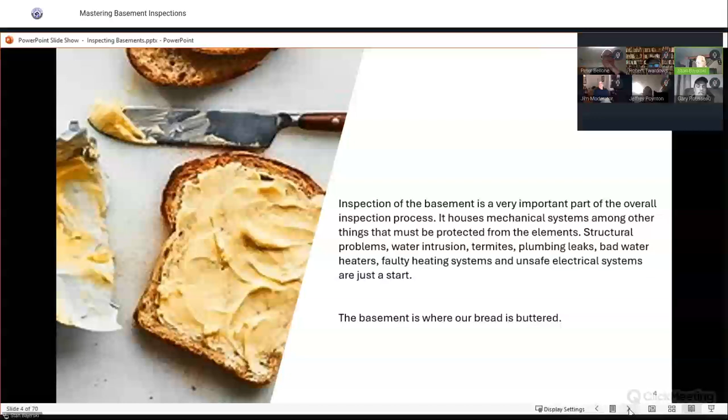Inspection of the basement is a very important part of the overall inspection process. It houses mechanical systems, among other things, that must be protected from the elements. Structural problems, water intrusion, termites, plumbing leaks, bad water heaters, faulty heating systems, and unsafe electrical systems are just the start. The basement is where our bread is buttered.

So, definition of a basement: the floor of a building which is partly or entirely below ground.

A little bit of history. In ancient civilizations, basements were primarily used for storage. They served as spaces to store water, wine, and food. These early basements were often simple cellars located below ground level.

During the Renaissance, basements evolved. Wealthy families utilized basement spaces for various purposes. Basements provided an area for cooking. Servants lived and worked in these underground spaces. Basements were used for washing clothes.

The concept of basements gained prominence during the industrialization of the United States in the 1950s. Basements transformed into more than mere cellars. They became versatile spaces. Many Americans now know basements as comfortable entertainment spaces. They continue to serve as storage areas. In some regions, basements are converted into habitable living spaces, and basement offices are also very common.

There are geographical factors. The use of basements varies based on geographical factors. Wet climates like Great Britain and Ireland may discourage basements due to flooding risks. Basements are standard in places with temperate continental climates.

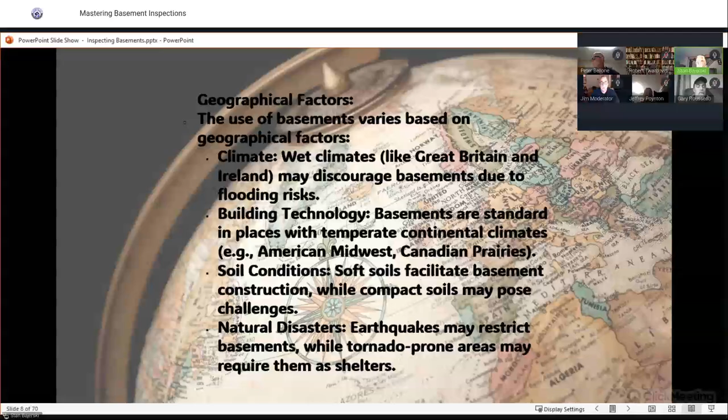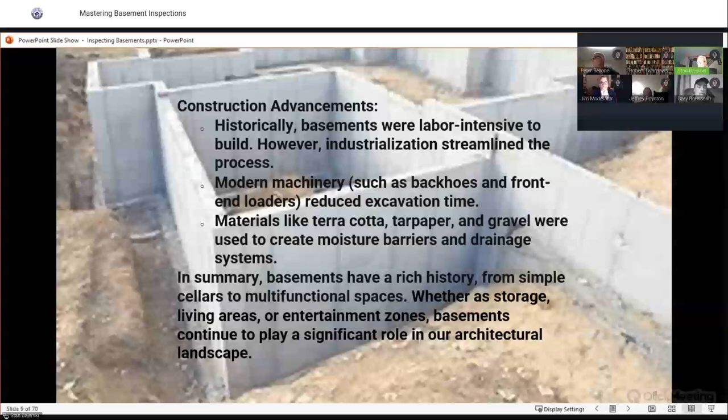Historically, basements were labor-intensive to build. However, industrialization streamlined the process. Modern machinery, such as backhoes and front-end loaders, reduced excavation time. Materials like terracotta, tar paper, and gravel were used to create moisture barriers and drainage systems. In summary, basements have a rich history, from simple cellars to multifunctional spaces. Whether as storage, living space, or entertainment zones, basements continue to play a significant role in our architectural landscape.

So I still see some root cellars out there. I'm sure you guys have as well. Now, mostly forgotten, root cellars were once fundamental to American settlers. Root cellars can be under the house or in a separate building, but either way, they were of great importance to many families from colonial times all the way up to World War II. The modern basement.

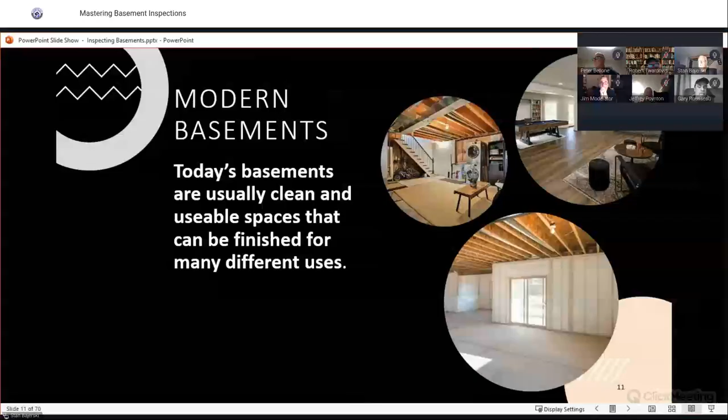Today's basements are usually clean and usable spaces that can be finished for many different uses. So believe it or not, and this fascinates me, as important a component as it is, the basement is not referred to as a standalone component in any standard of practice.

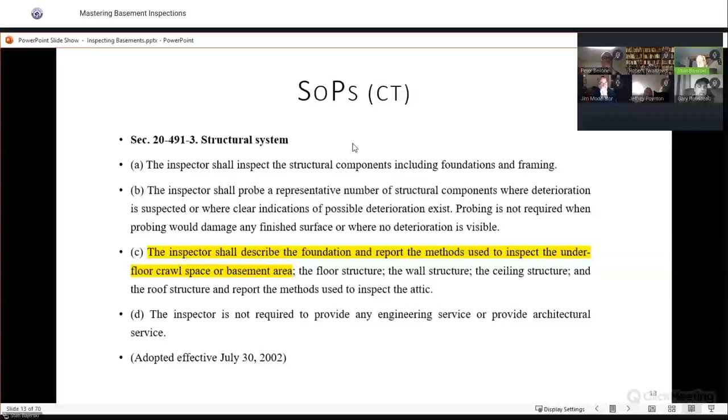In Connecticut's standard of practice, under structural system, the only mention of the word basement is that the inspector shall describe the foundation and report the methods used to inspect the underfloor, crawl space, or basement area. They also talk about describing and inspecting the floor structure, wall structure, ceiling structure, roof structure, and report methods used to inspect the attic. It doesn't say anything about water penetration or dampness, which I find surprising because standards are supposed to get us all on the same page and help the consumer.

The Florida standards of practice don't mention that word at all in their structural part. And that's kind of to be expected because I'm assuming there's not many basements in Florida.

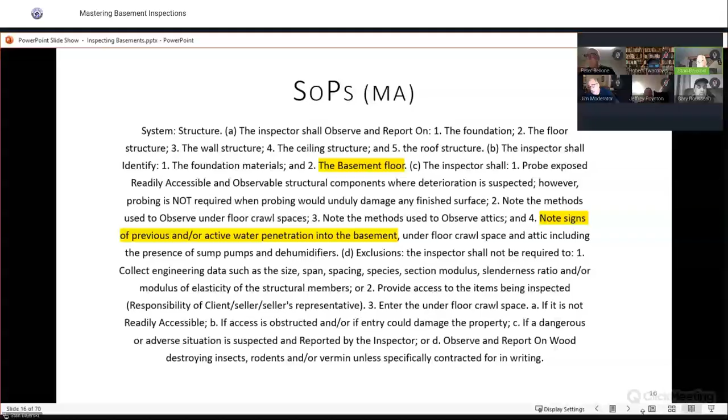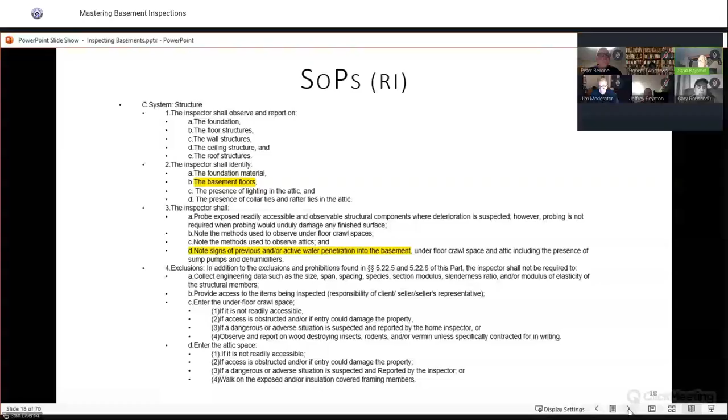New Jersey, nothing. And Rhode Island, also very similar to Mass - they have to identify the basement floors and note signs of previous and or active water penetration into the basement. But at least in those states, those are the only mentions of a basement, and it's not actually as a component, it's just referred to for a couple of items.

In the basement, you will be describing the foundation materials. The three most popular will be poured concrete, concrete block, and stone.

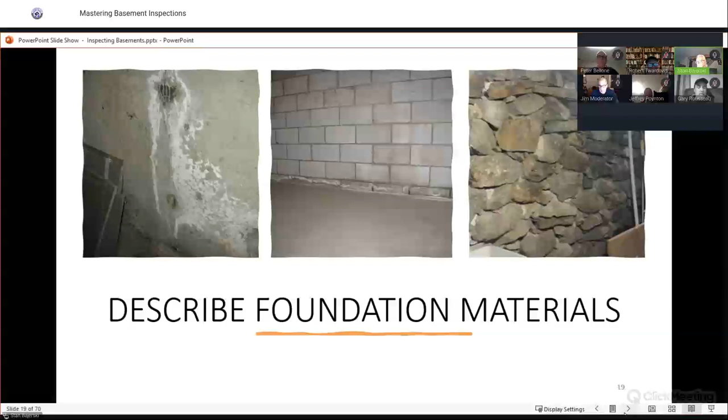Describing foundation materials - so we have different types of foundation materials, but we have to be in the basement to actually be able to see those.

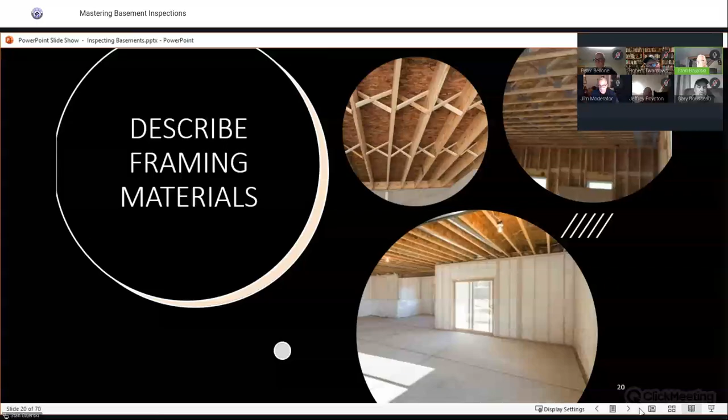A couple of narratives for framing. I used to go through a pretty long spiel: visible floor framing consists of wood 2x8 floor joists, 16 inches on center, with wood cross bridging supported by a built-up wood carry beam and steel lally columns. You could also say the home is platform framed, and in platform framing, multiple platforms can be constructed on top of the framework. Each platform provides vertical support for each level. In building construction, in most cases, platform framing is the method of choice, blah, blah, blah.

And then you could just be very straightforward and say the house is wood frame. All of those meet what's required in the standards to describe the framing. But my point is that you have to be in the basement to do that - that's another task you perform while doing your basement inspection.

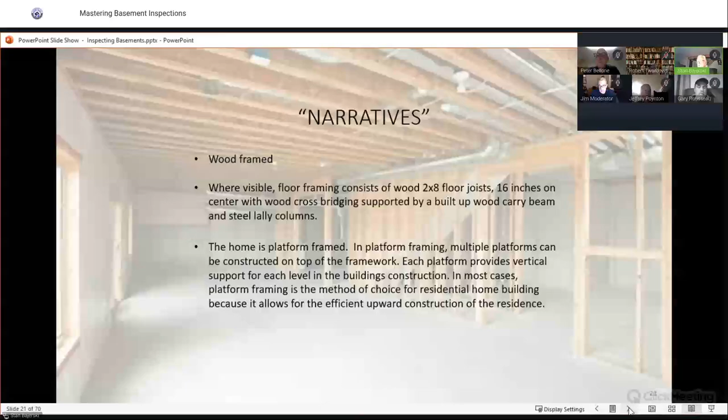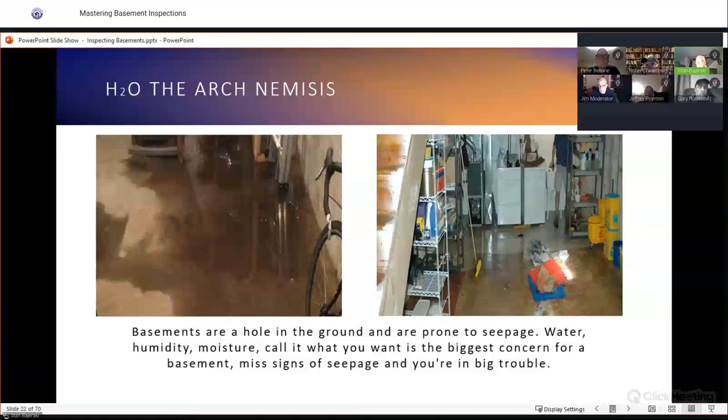But I think the biggest issue that most people think of when they talk about basements is water. H2O, the arch nemesis of a home, but the basement specifically. Basements are a hole in the ground and are prone to seepage. Water, humidity, moisture, call it what you want, is the biggest concern for a basement. Miss signs of seepage and you're in big trouble.

I was a member of ASHI for probably my first 4 or 5 years. Then when licensing came into effect in the state of Connecticut in 2001 - so I guess I was longer in ASHI - I became a member of the Connecticut Association of Home Inspectors. So I had an opportunity to rub elbows with a lot of home inspectors, hear a lot of stories, talk to a lot of these guys.

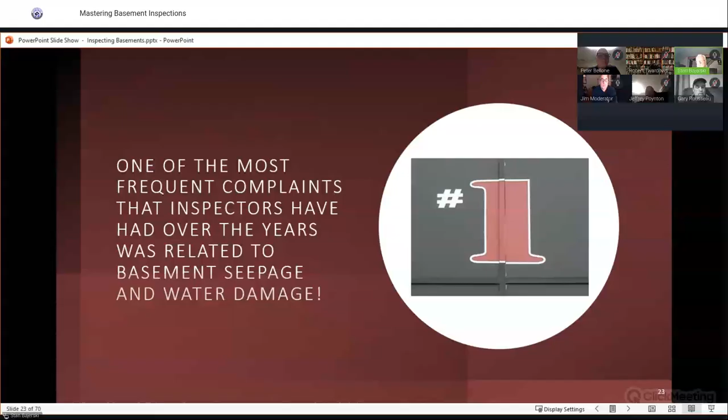One of the most frequent complaints that inspectors have had over the years was related to basement seepage and water damage. It's hard to pinpoint unless you talk to people, read their reports why these complaints come up. You have to think that you report on whatever you see that you may consider potential seepage from the outside, and then what you may see on the inside. But it is one of the biggest, in my opinion.

Unfinished basements - just because they're unfinished doesn't mean you're going to see everything. Obviously there's storage, and we're going to talk about that in a minute. But unfinished basements give you more visible framing and foundation to take a look at.

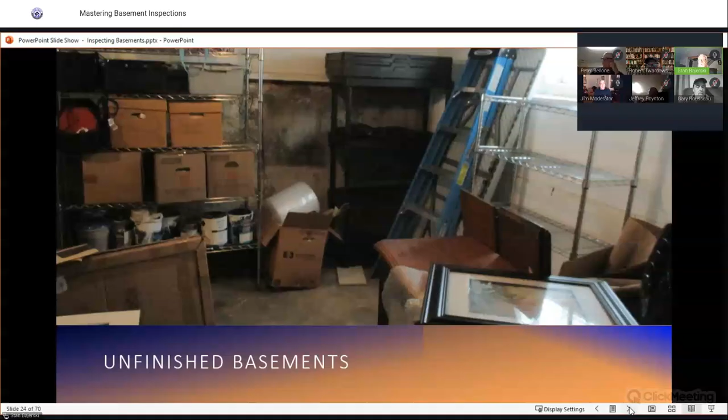Telltale signs. For me, as soon as I walk down the basement, I'm using my nose - so musty odor. If you smell that musty odor, then there's got to be some kind of dampness, evidence of dampness or seepage around someplace. It's a little different than basement smell, in my opinion. Efflorescence on the walls - I think that's a dead giveaway of at least humidity and dampness, if not some degree of seepage at some point in time.

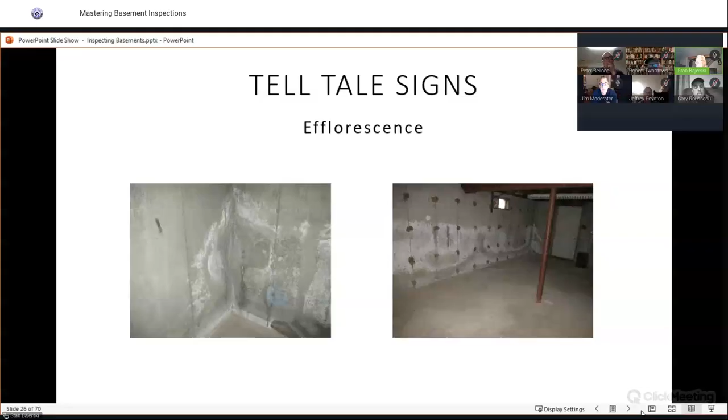Scaling, mainly on stone walls, even bare stone walls, the mortar starts to break down. The walls that are painted or sealed will start scaling off. That's all evidence of dampness and seepage.

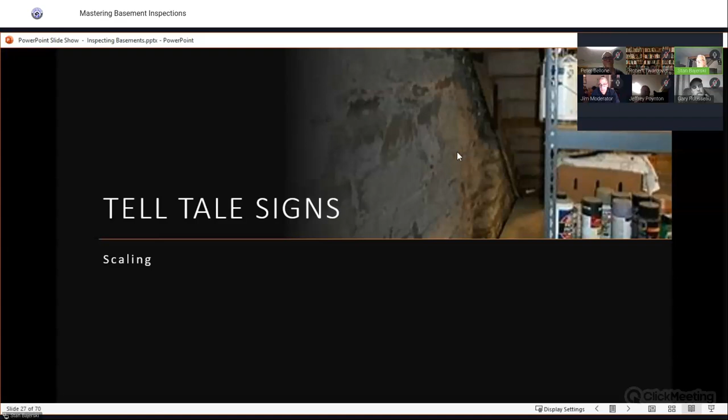Stairways. That wood stairway, 99% of the time, has been in that house since conception, so it's been through everything. If it's rotted at the base, that didn't happen from a one-time water entry thing. That's dampness or seepage that has gone on for a long time. So I always look at the base of the stairway here.

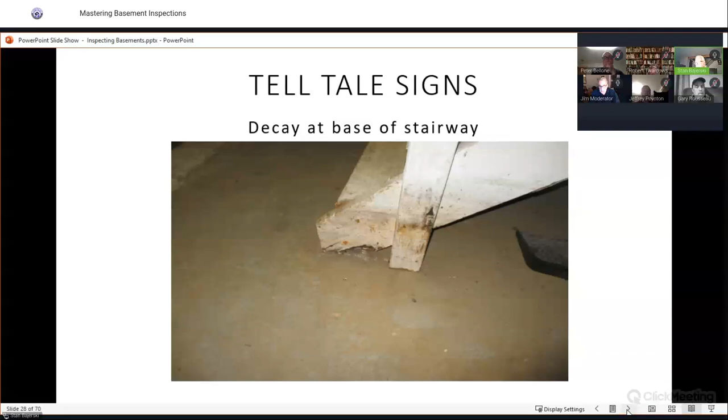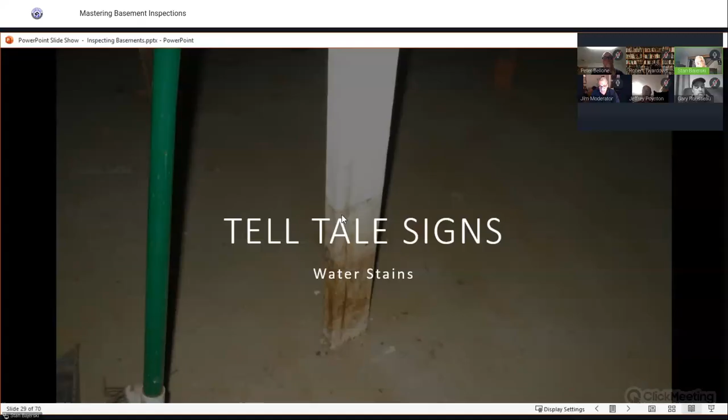Any wood in contact with the ground that has water stains. Damp slabs can wick water up, but in my opinion, this right here is a water stain. You all could see my pointer, right? Okay, yep. So that's, to me, a water level stain versus maybe some wicking.

There's a few pictures in here that came from the same basement, and I'll try and tie them in. They're not in order.

Rust on any piece of metal touching the ground. In this case, this was a finished basement with a metal cabinet. This is a furnace. Again, that rust can climb up that furnace, but I'm thinking there was some water in that basement.

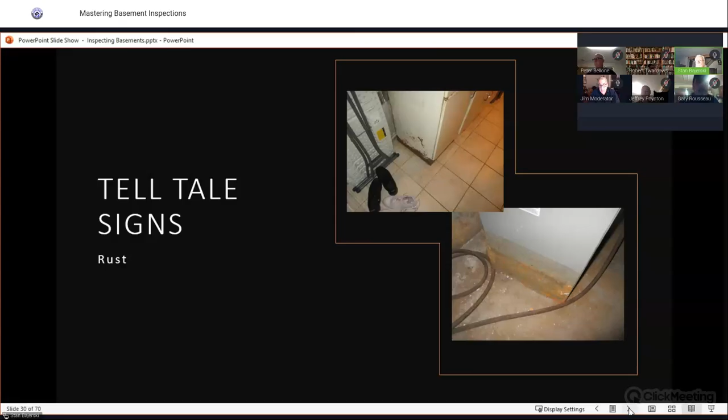Rusted lally columns - this guy's pretty bad. And rotted wood columns - this guy's gone here. So you want to look really close at the bottom of the column. Most of them don't look like this, but you'll see water stains, you'll see dampness. You may even see rust climbing up the column as it's wicking in through the concrete.

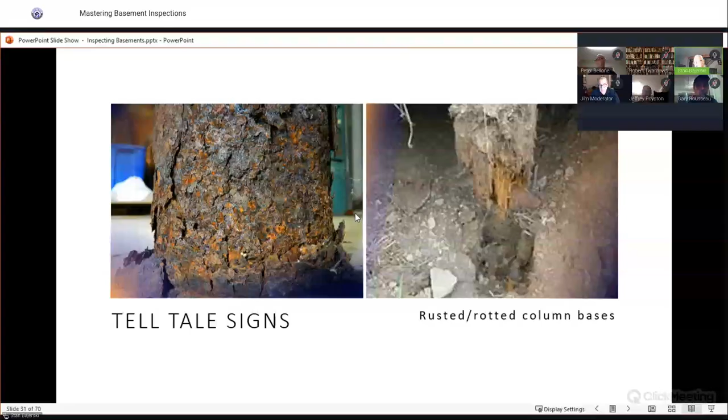Sometimes you're not going to be able to tell if it's just a damp basement, if there's a high water table around the house, or if it actually had seeped in, but you want to put everybody on notice, in my opinion, anyways.

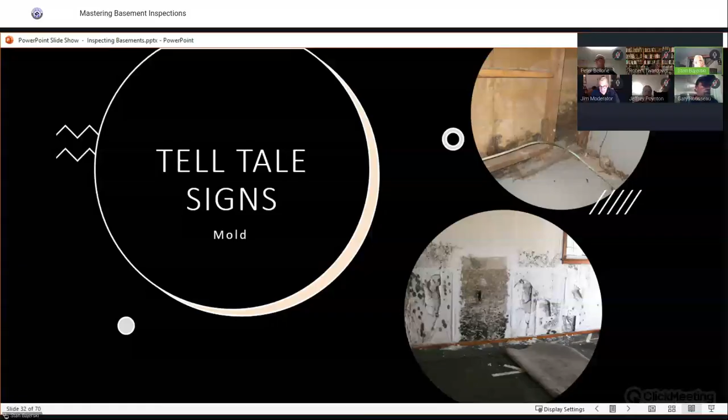Mold. Mold is sometimes very obvious, like this picture here, even this. So those things hit you right in the face.

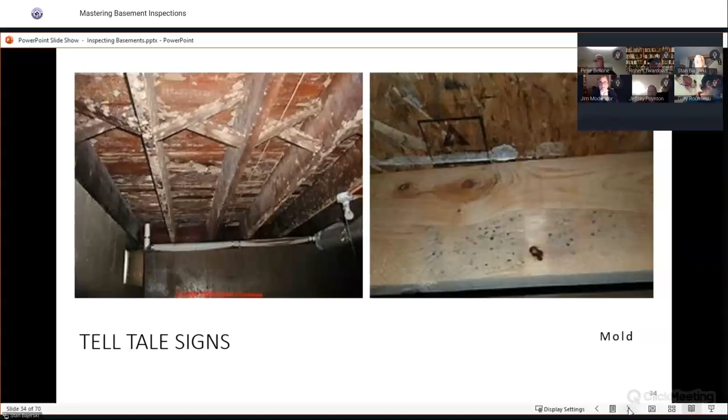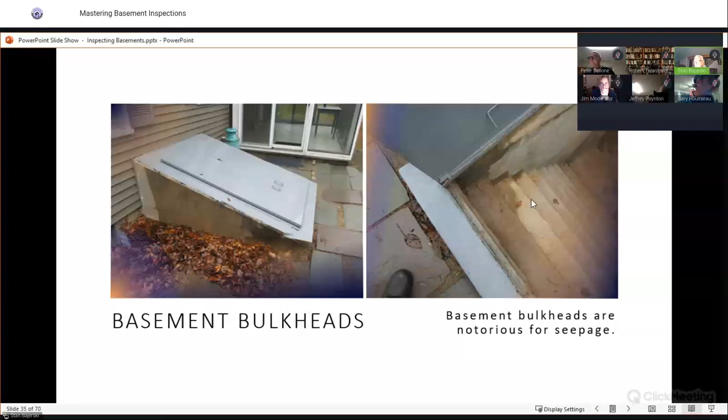You're going to see all different types, right? Some will be metal, some will be wood, some are a combination of concrete, and some of them are not one piece - they're kind of scabbed together. But if there's a bulkhead entrance in the basement, I put a statement saying that all bulkheads are potential leakage points. So be prepared. Window wells.

If you have a window well, a large portion of this soil here and down should be gravel. If you leave material like this in there and it composts, then it prevents the water from getting to the gravel, and it collects water, and then it can leak into the basement window. There's several inches on this one, so it's not huge, but it could happen. And this is what it would look like from the inside as the water pours into the window.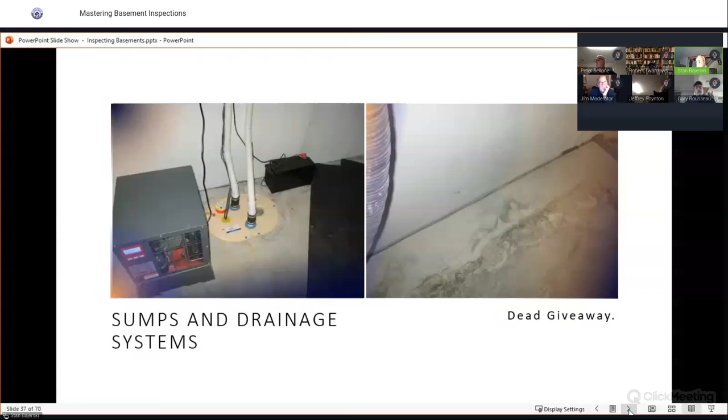So for me, I have some standard statements that make every one of my reports to cover my butt. One of them is: there are conditions on the exterior of this home that are conducive to basement dampness and seepage. I don't care how small it is, it goes in my report. If it's a dislocated elbow, a missing downspout extension, or a slight dip in the grading, anything that puts somebody on notice that they can have dampness or seepage.

To minimize potential for basement dampness and seepage, the gutters and downspouts must be kept in proper working order. Surface draining downspouts should be extended away from the foundation. Grading around the entire home should be maintained to slope away from the foundation. The use of a dehumidifier is also recommended.

It is advised that valuables be kept off the floor until some living experience has been gained. I don't know what else to tell people. You can point out a dozen things on the outside that can contribute to basement dampness and seepage. Let them buy the house, and you drive back six months later and tell me how many of those things have been corrected. So you've got to protect your butt with your language.

And then last but not least, and this pertains to a lot of flips: if the basement walls are freshly painted and the floor is freshly painted, there was no evidence of chronic or persistent seepage. However, because everything's painted, foundation walls and flooring have been recently painted, which can remove or mask evidence of seepage.

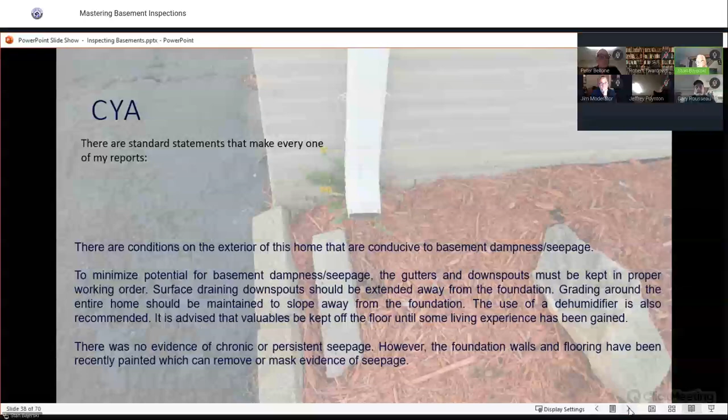This is our report, and your agreement and your insurance are the only protection that we have. No matter how diligent we are, just as much has to be written in a report to protect ourselves as finding problems in a house.

In a basement, we can also find exposed kraft paper on insulation. It says right on here, a warning. What more important word can you use? It's flammable and shouldn't be exposed. So I don't care where I find it, if it's in the basement, in the attic, wherever it is, I'm telling people, you've got to read that little warning on there and you've got to do something about this.

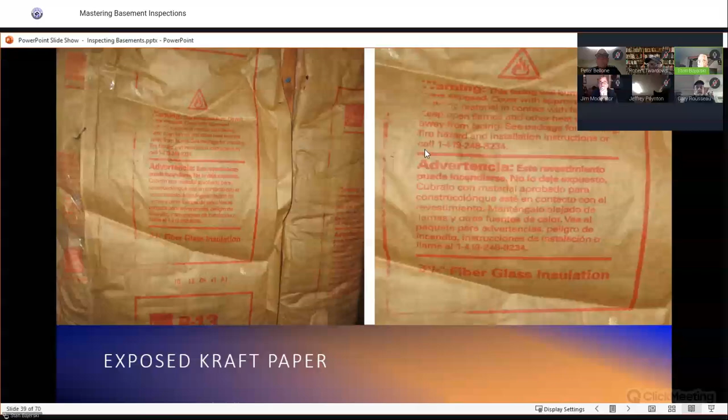Termites. So I know people handle termites differently. For the first, I don't even remember, 10 years of my career, I brought a pest control company to do the termite portion. And they were pretty good, but then they got sold and a new guy came in, and he just bought businesses. He really didn't know anything about the termite business.

They didn't show up, or they came late, or if they came early, they'd be all done. As we were getting there, they'd be leaving and go, oh, everything's okay. And I take a step in the basement, the first thing I see is a mud tube. So I said, you know what, if I'm going to screw myself up, I'm going to get screwed, I'm going to screw myself up. So I started doing them myself.

Because we're looking at the same stuff they're looking at, right? We're going to look for decay in those areas. We're going to look for structural issues. Those are the areas that we're bound to see termites.

In Connecticut, we had this discussion twice with the Connecticut Association of Home Inspectors and people from the pest control industry about who can do a termite inspection and who can't. And they are still saying, from the last time we spoke, which is now probably almost two years ago, that you as a home inspector cannot advise treatment.

So when the termite police come and tell me that I can't do that, then we'll see what happens. But so you're going to look for evidence of termites, and the basement is a big area that has to be inspected. Stan, you can't advise treatment, but you can advise, you can show damage and you can advise further recommendation, right? I mean, like by a termite.

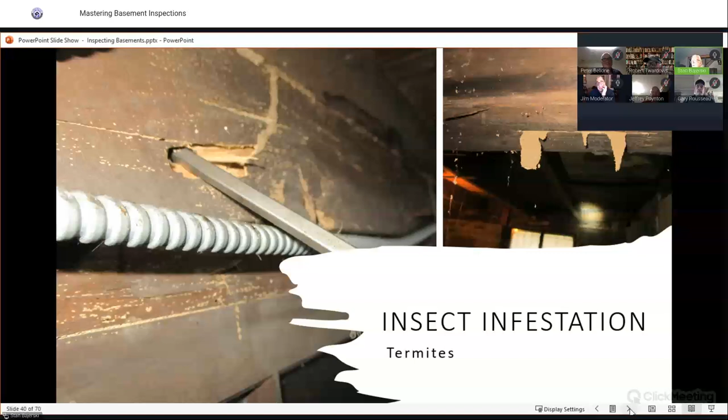So, termites. Powder post beetle, probably not as prevalent in newer homes, depending on what you decide is new. Probably when we started building with basements and concrete floors that kept the basement drier, these guys became less prevalent. Unfortunately, this is what you have to look for, the exit holes. The damage isn't always evident, but badly damaged powder post beetle wood may look okay, though if you hit it with a good sized hammer, you'd probably disintegrate it. So basements are usually where we find that.

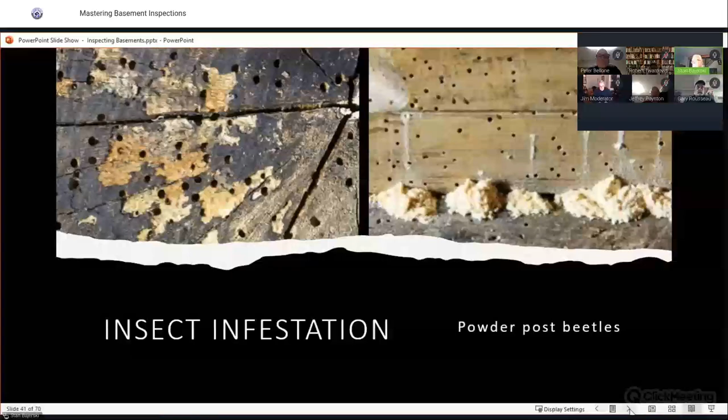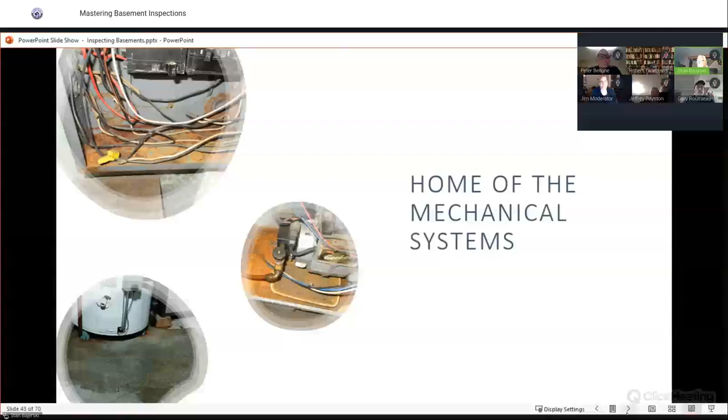In a basement, most of the home's mechanical systems are usually located, they live in the basement. So while we're doing our basement inspection, we're also probably performing other sections of our report, but they do require us to be in the basement. So when the basement floods, so do the mechanical pieces of equipment.

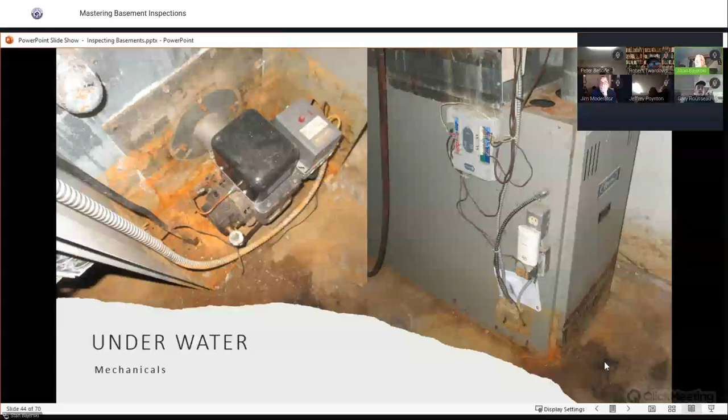This burner was underwater, you can see that water line. It doesn't look like a newer burner, so I don't know if they dried it out, but that's an older style burner that probably existed when that furnace flooded. And this, it ran, for sure.

This is a house on the shoreline in Milford. This area here was a basement, and then it went up to a crawl space, and the panel flooded up to here. Water got into the base of the panel, but the rest of this panel didn't have a speck of rust or water stain on it. This guy was underwater during the hurricane. So these are the kind of things you may see that are basement related and related to another component of your report.

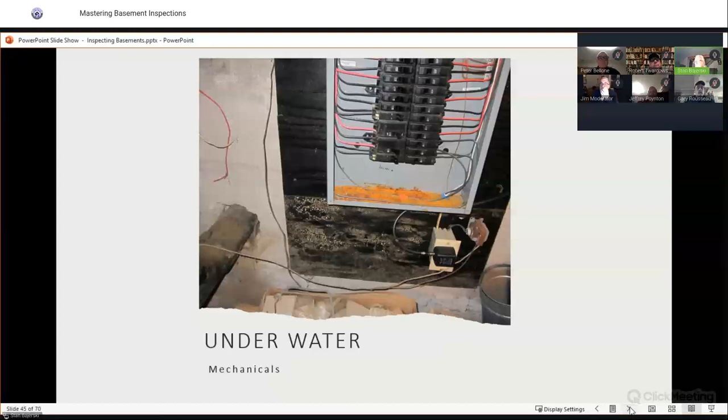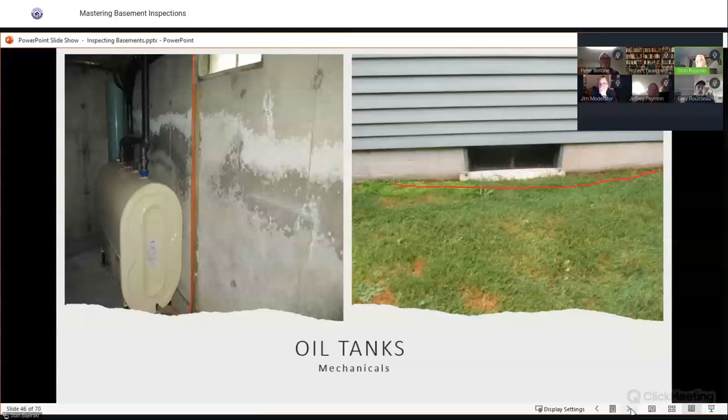Now, I think in this case, this tank was under a concrete patio and was still there, and it was abandoned, but the buyer didn't want it, he wanted it removed and didn't care about the patio. That deal fell through because they couldn't come to an agreement, and I wound up doing another inspection for this guy.

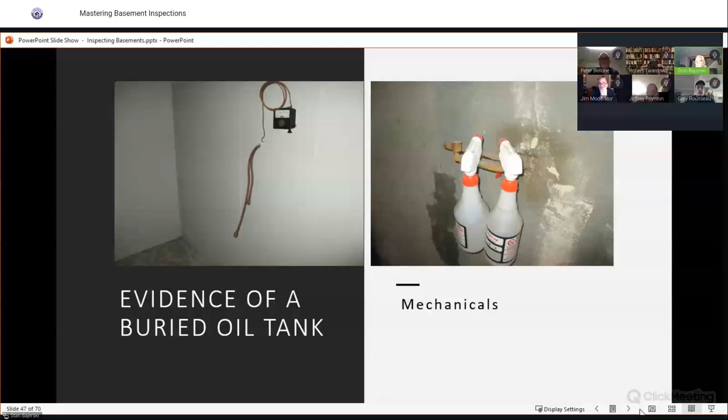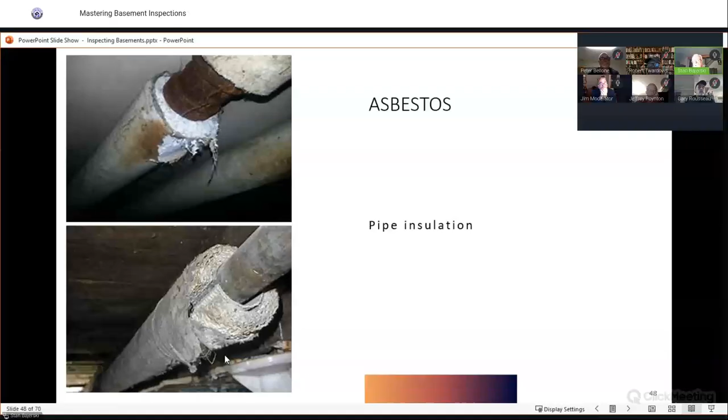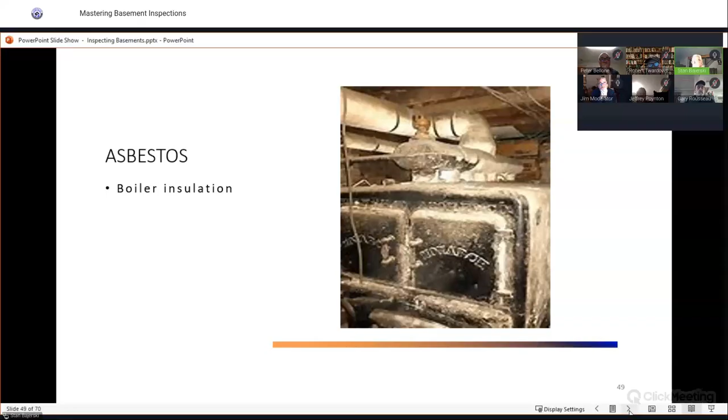Asbestos, or material that likely contains asbestos, as we like to say in our profession. Pipe insulation, especially damaged or worn like this, is a big issue. This boiler had asbestos on it, but they attempted to remove it and there was residual left, plus it was still left on the pipes. So it could be on the piping, the boilers, or the ductwork.

And this has a very high concentration of asbestos. Normally, at least around here, they just take the ductwork, everything out, and put new ductwork in. But again, this is something discovered in the basement, which is not considered.

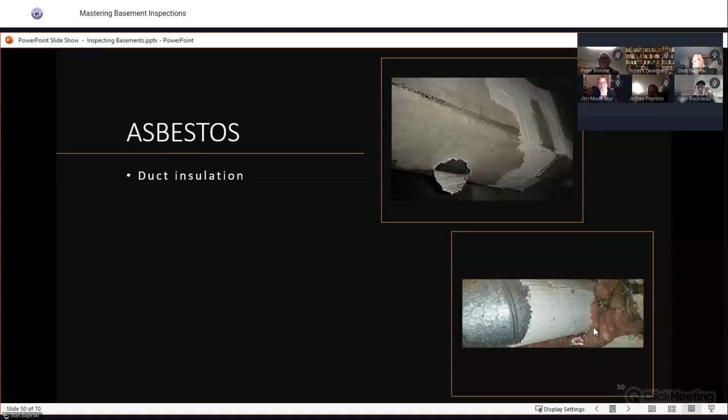The other thing, Stan, going back to the asbestos - I've done inspections where I come in, especially in West Hartford, and you'll come into the basement and it's all ductwork with shiny new insulation all over it, all over the pipe. It's brand new in a 1950s house. I'll come in and say there's asbestos underneath those pipes, and they ask how do I know. I say that insulation's too new, they're trying to hide something. If you slowly peel it back, nine times out of ten, you're right. So just because you can't see it doesn't mean it's not there.

Yes, and there were times when I was always criticizing the standards for different reasons, and now I understand why sometimes they are what they are. They're definitely there to help us as well. But the standards say that you don't have to find anything that's concealed or latent.

But how far do you go to unconceal something is the question. And now we're bringing in equipment like infrared cameras and borescopes that are pushing us to find things that are concealed.

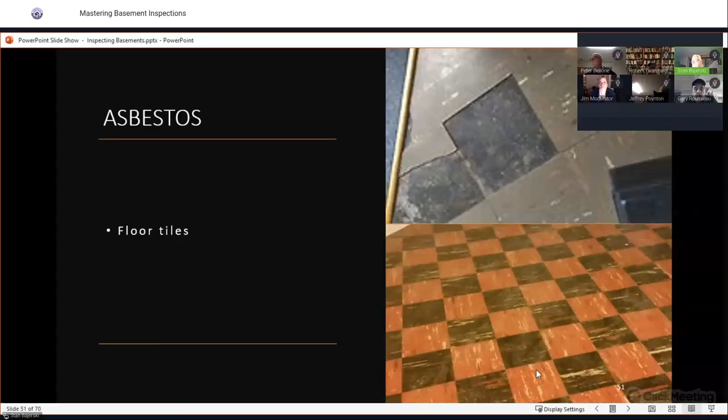So floor tiles that we kind of know from age, size, and just the looks can contain asbestos - we'll find that in the basement. Not often, but a lot of times I'll find these spline ceiling tiles in the basement, and depending on their age, a lot of them contain asbestos in high amounts. So they could be in a basement area as well.

Even if you think it's pressboard? Well, how am I going to know that? Right - if I see a spline tile, I say that it may contain asbestos and should be tested. Because, you know, I've said this a hundred times before: I'm looking out for number one, and if I take care of myself, I'm usually taking care of my client as well, whether they know it or not.

A house in Milford, fairly new - they built the bedroom in the basement in the area where the exit for the bulkhead entrance was, then stopped building it and sold the house. And I was telling them, they were selling it.

And the clients that I was working for, I said, this is not an egress. I said, check with the building department. And sure enough, they told them, look, if that's covered with snow and ice and it prevents you from getting out of here, it can't be considered the egress.

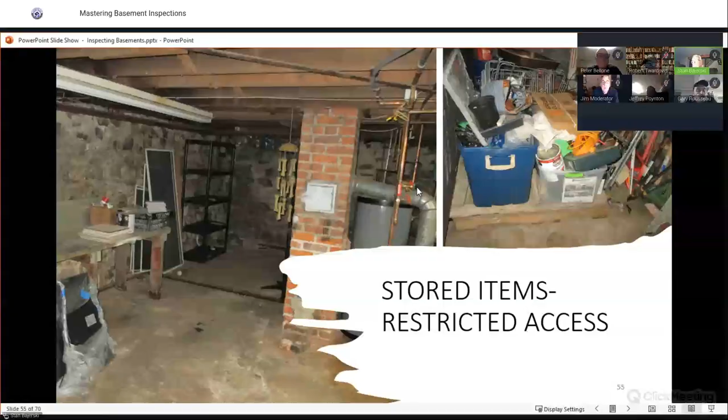So you remember in the intro to this, basements were used as storage. They certainly were. This basement had multiple problems. Water, big time water. The water main was leaking into the basement. It was a fun one.

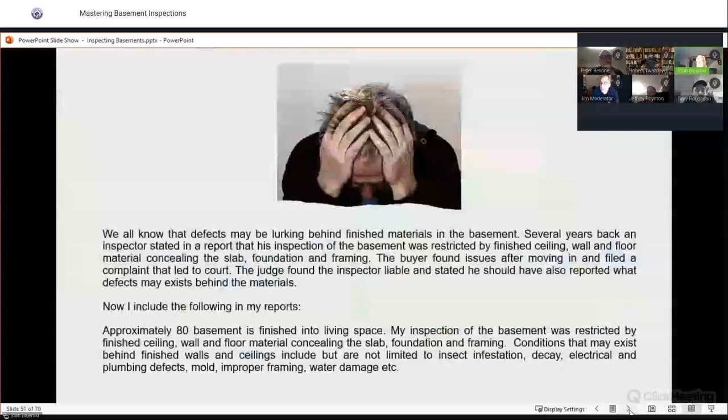So finished basements are a different breed, right? Sometimes you go, oh, basement's finished, good, there's not much to see. But that in itself is a problem. We're not going to go through too much about finished basements, but I am going to bring this up. It could have been even 10 years ago, because as you get older you lose track of time. But I was at a CAHI meeting.

We all know that defects may be lurking behind finished materials in a basement. Several years back, an inspector stated in a report that his inspection of the basement was restricted by finished ceiling, wall, floor material concealing the slab foundation and framing. The buyer found issues after moving in and filed a complaint that led to court. The judge found the inspector liable and stated he should have also reported what defects may exist behind the materials. So again, we have to think for other people, and how far do you take that?

So now I include the following in my reports. Whatever percentage, approximately 80% of the basement is finished into living space. My inspection of the basement was restricted by finished ceiling, wall, and flooring material, concealing the slab foundation and framing, exactly what he said up there. Conditions that may exist behind finished walls and ceilings include, but are not limited to, insect infestation, decay, electrical and plumbing defects, mold, improper framing, water damage, etc.

What else? I mean, you could go on and on, I guess. Old booze bottles, bags of marijuana. But again, that's done in the basement. This poor guy here gives him a headache.

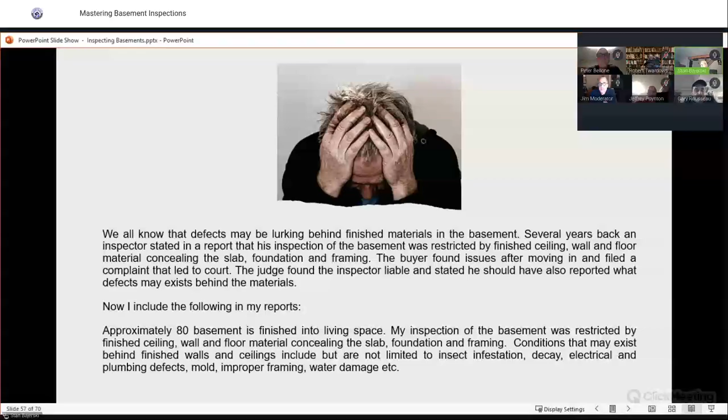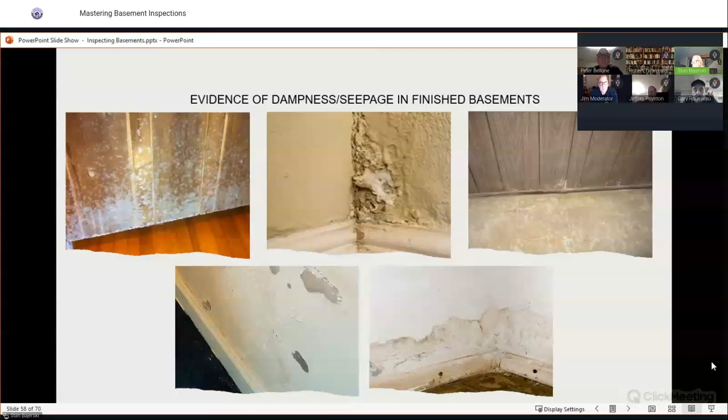So from the field with Inspector Clouseau: it's hard enough to predict the future, is it any easier to predict the past? The future, well, it didn't happen yet. There may be things that point to something happening, but does not necessarily mean it will. But the past, on the other hand, may be easier to determine depending on the evidence. So as home inspectors, we must find the evidence and predict the past.

Wet basements, for example, unless a basement was cleaned and painted a day before your inspection, there is always evidence. So this sticks out in my mind, I felt bad for these kids. A case in point, a home I inspected had the following evidence of a wet basement that was discovered and reported on, and of course, pictures to boot. The bulkhead entrance had cracks that were sealed with mortar and caulking.

The wood workbench immediately to the left of the bulkhead had plywood applied across the legs, which was severely decayed, as were the 2x4 legs. There was a filled in or abandoned sump pit to the right of the bulkhead entrance. There was a small makeshift sump and sump pump on the right side of the basement near the heating system, an odd spot to say the least, and the floor tiles in the finished area were loose, chipped, and lifting. However, the sheetrock was freshly painted and the baseboard was a plastic material. This was all reported on as being evidence that the basement had a chronic or persistent seepage problem in the past.

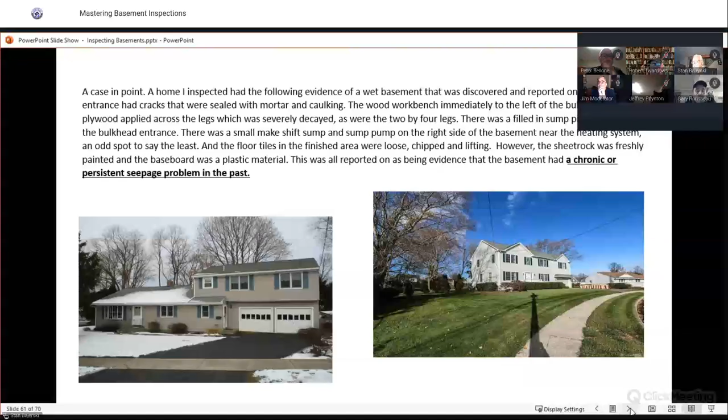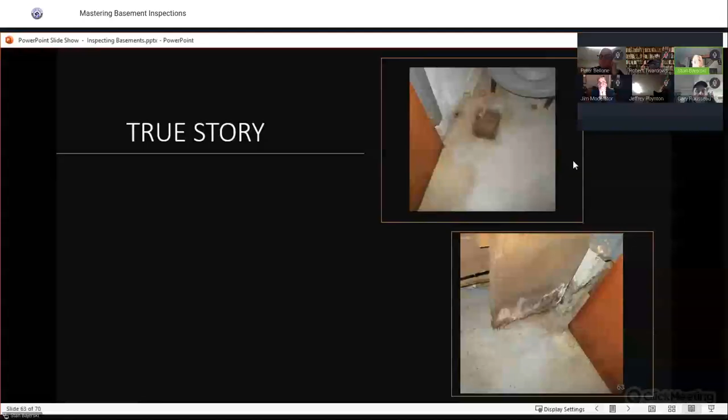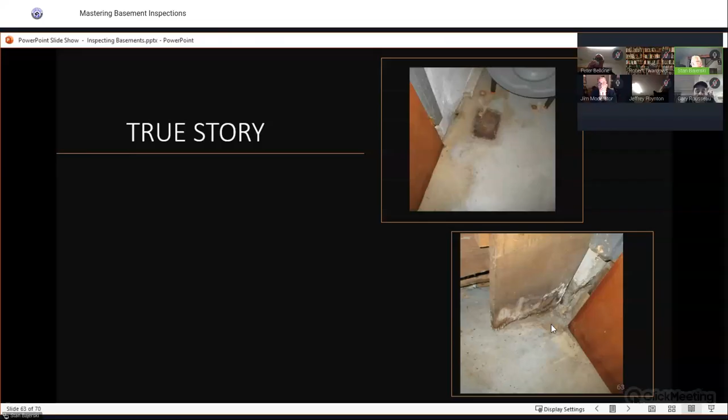This is the workbench, the plywood that I could stick my screwdriver through, and the base of the legs were also rotted out. This does not happen overnight or from one-time water intrusion. This is the new sump behind the water heater and furnace, and it leaked like a sieve and was very rusted, like it was underwater all the time.

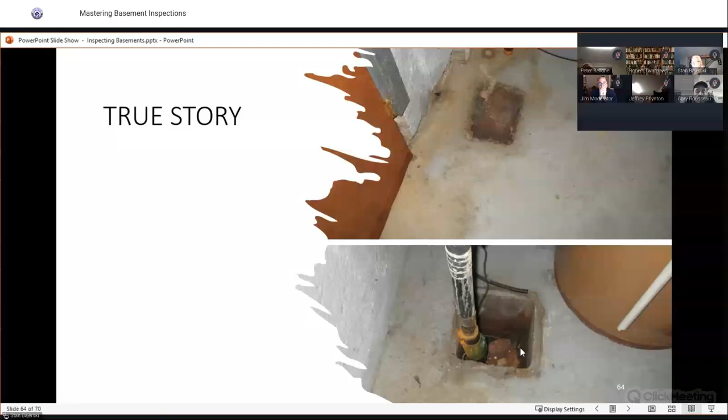So the buyers of the home questioned the owners who owned the home for almost 20 years. They stated that the basement had seepage once after a bad winter when several feet of snow melted in the spring. The buyers took that information as gospel and purchased the home. And by the way, the seller's agent is a nasty woman. The day after they moved in during February, they had significant seepage for days. No rain, very little snow on the ground.

So I was asked by a young couple that purchased the home for advice. Their attorney said that it was their job to prove that there was more than a one-time water event. So how does wood decay? It could get wet once and dry out. It can get maybe wet a couple times and dry out. But if it's constantly getting wet, it is going to rot. How can I prove that? Is there a science? Is there a study?

I didn't know what to tell them. I said, I will gladly go to bat for you, but I don't have any scientific facts to base that on out of practicality. And how much are they going to spend to prove that? Are they going to spend the money to fix that basement, make it waterproof? Who knows what was involved in that? So I don't know where that went, and sometimes I don't want to know.

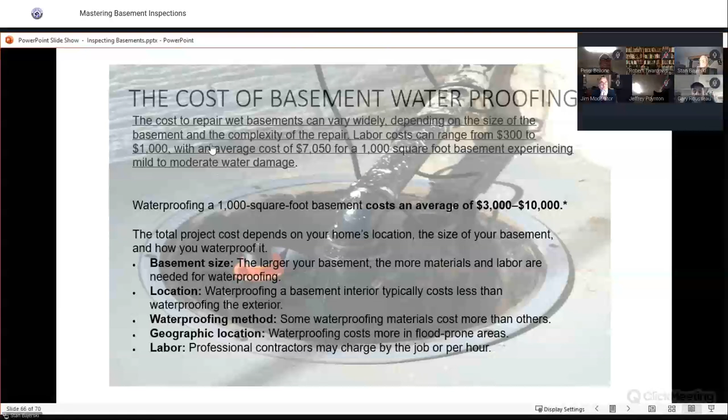So the cost of basement waterproofing. I don't believe all these numbers, I took this off the web, but cost to repair wet basements can vary widely depending on the size of the basement and the complexity of the repair. Labor costs can range from $300 to $1,000, with an average cost of $7,050 for a 1,000 square foot basement experiencing mild to moderate water damage. Waterproofing a 1,000 square foot basement costs an average of $3,000 to $10,000, but that depends on a lot of things. Total project cost depends on your home's location, the size of your basement, and how you waterproof it. The larger your basement, the more materials and labor are needed. Waterproofing a basement interior typically costs less than waterproofing the exterior. Some waterproofing materials cost more than others, and waterproofing costs more in flood-prone areas. Professional contractors may charge by the job or per hour.

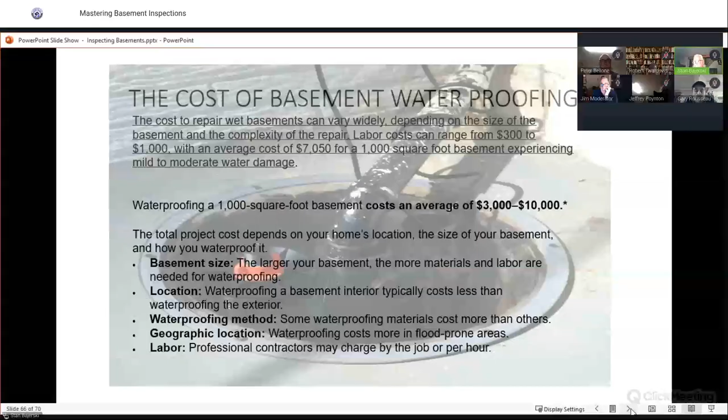Dampness in a basement is a costly thing if you try to correct it. There are methods of waterproofing. So on the interior, forget these numbers, I don't believe they are accurate. Epoxy injection, you've all seen cracks that have these little tubes that they fire in that epoxy.

I'm going to say that would be the beginning of a trial and error. Is the entire basement problem from those cracks, or are we starting with the small stuff and getting bigger?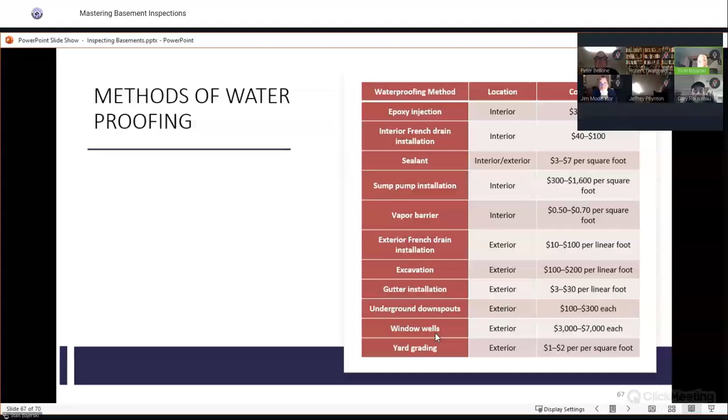Interior French drain installation, that's usually tied to a sump pump. Sealant, interior and exterior, sealing the walls on the outside and the inside. Sump pump installation, vapor barriers, exterior French drain installation, excavation on the outside to get to the cracks and seal them. Gutter installation, first thing you should do if they're bad or you don't have any. Underground downspouts for the gutters, window wells, yard grading.

It's funny because I live in Milford, and a lot of contractors go to Fairfield County because they get more money. So the better contractors from down this area do a lot of work in Fairfield County, only because they can charge more. But they're paying more to go back and forth because they sit in traffic for hours, even in the morning, depending on what time they leave. So there is a price for everything, but this is definitely a true statement.

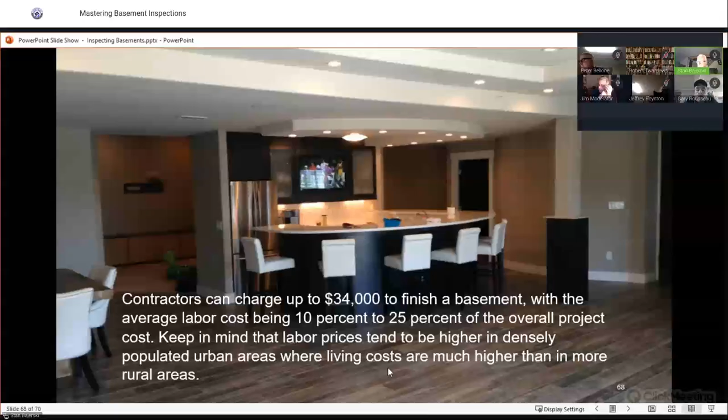So again, that's covering your butt. Sometimes people are so excited to buy a house that even though they're shaking their heads yes, they may not be comprehending everything you're telling them. Usually water scares the bejesus out of people, and they may pay a little bit more attention when you start pointing out things that are proof of seepage.

And then of course, if it's wet or there's standing water at the time of inspection, that's golden. And that does happen, not often, but it does happen. So any little thing that you think could be an issue, you need to put in your report.

We all know, if you've been in this business long enough, that they're going to pick on a lot of stuff, just like Jim's story. In Connecticut, I'm going to say most times the people are at the inspection. I wouldn't want it any other way. I have an opportunity, they see me in action. No matter how well you write in your report, that discussion, looking at a problem, to me is huge.

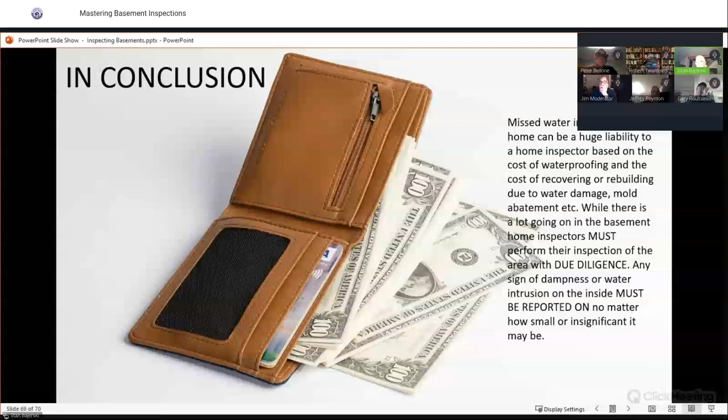But you can't talk about it and then not put it in the report. You need to make sure you get this stuff down. It's just from years and years of seeing people shelling out money or going to their insurance company because of water coming in a basement. And the sad thing is, if they reported on it or didn't report on it strong enough, they're not getting this right. They're not getting the idea of the home inspection. It's not just finding problems and saying, hey, you got a water problem. You really got to report everything, because that's going to help you in the long run if these people don't act upon what we tell them.